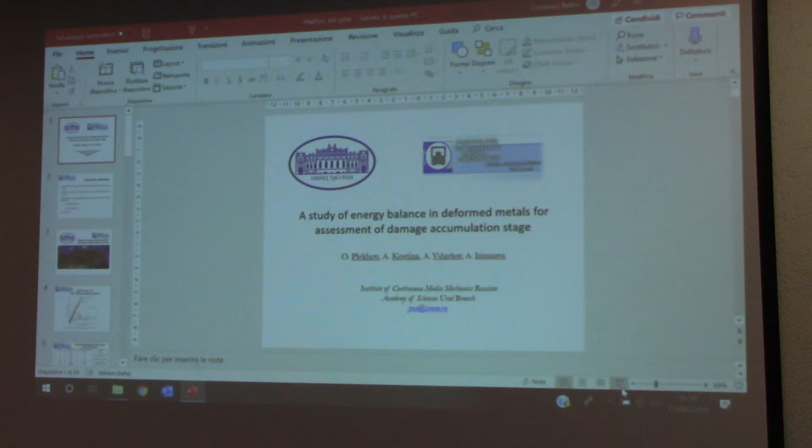I'd very much like to speak about infrared thermography and about stored and dissipated energy, but in this presentation I will speak about a theoretical approach. We try to simulate the problem of stored energy in the metal. And I will use the presentation of Mrs. Svideniko as an introduction for my presentation, and I'll just summarize what has been said in the first presentation.

Now we and a lot of teams can measure the dissipated energy during the tensile test. If we can measure the dissipated part, we can measure mechanical work, and finally we can measure the stored energy. In the beginning of my presentation, I will say several words about why it's interesting to measure the stored energy. After, I will present our attempt to develop an analogical model, and will show some examples of numerical simulation.

So this work is going on in the Perm Federal Research Center, and I have to say several words about the research center. Now in Perm we have collected several institutes, and we have a pretty big center, about 1,000 people. It's a multidisciplinary center, with biological, geomechanical, chemical, and mechanical applications. And we launched very interesting transdisciplinary research, and some of it was presented at this conference.

So the next slide presents the outline of the presentation. In the beginning, I will say a lot about motivation, after that the mathematical model, and examples of simulation. So before starting, just an idea about Russia and the location of our institute. We are not far from Europe, just on the geographical border of Europe. It's located near our city.

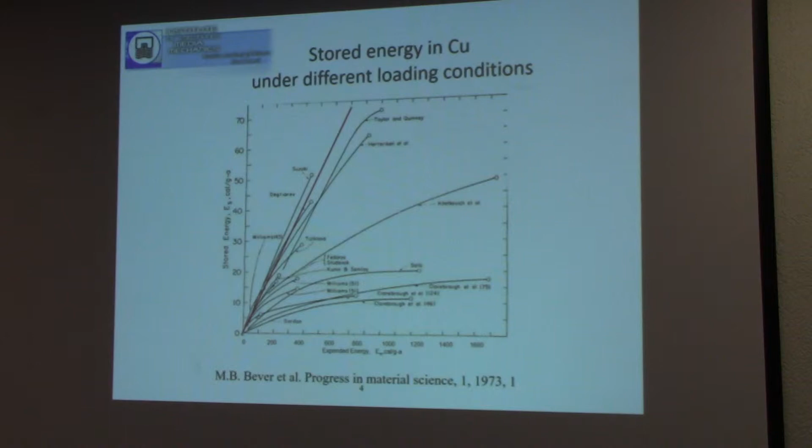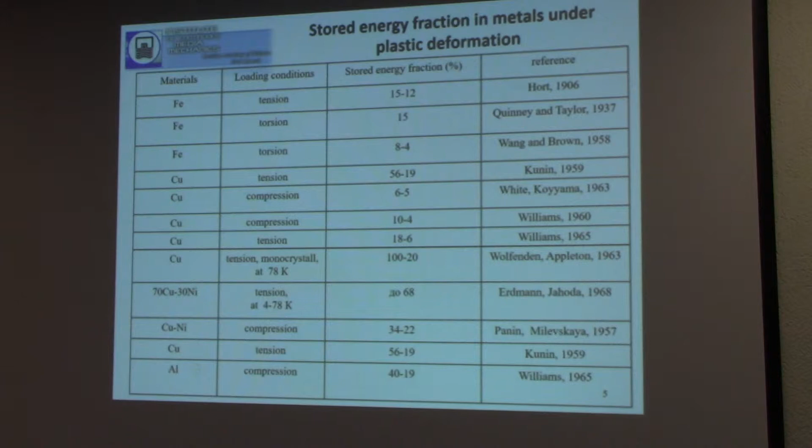And if we have a look at another work mentioned in the Bever report, we can see extremely big values of stored energy. For example, at very low temperature, plastic deformation is a completely undissipated process. It's published by Bever. I have never checked it experimentally, but it's possible. And if we go to new experimental investigations, I have to mention the team of Professor Oliferuk.

They made very interesting experiments with control samples, and measured the rate of stored energy under plastic deformation of steel. And we can see that the rate of stored energy can increase up to 43% in the beginning of the plastic deformation process. Here in our work, it's dynamic loading, and we can see also the dissipated part. It's quite small for some materials.

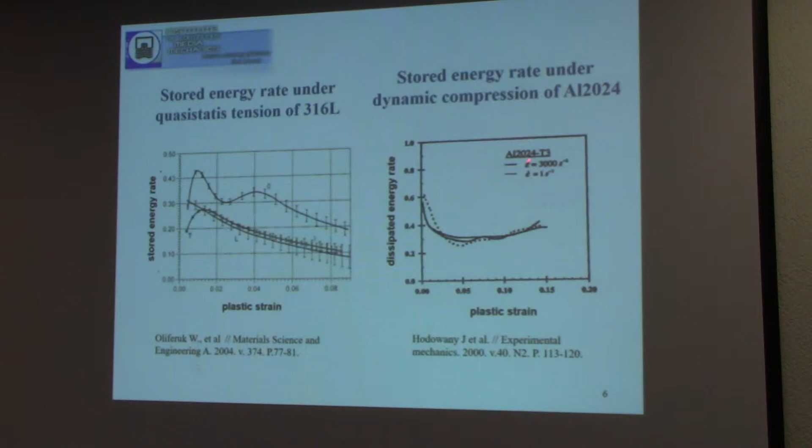We can go further, and I would like to show this picture. It's about 40 years old. It was published in Russian books, which means the results were obtained before, about 50 years ago. And this work was devoted to the thermodynamics of strength and fracture.

Here, it's not very good quality, but the general idea: it's different steels under cyclic loading, and the people measured the stored energy under cyclic loading and have shown that fracture corresponds to the same value of stored energy. The stored energy, not dissipated but stored, is a well-defined fracture criterion.

Generally, if we assume the Taylor-Quinney coefficient is constant, we can say that the stored part is proportional to the dissipated part and try to measure the dissipated part as a fracture criterion. But sometimes the proportionality can change, and from this point of view, the stored part is the most important part.

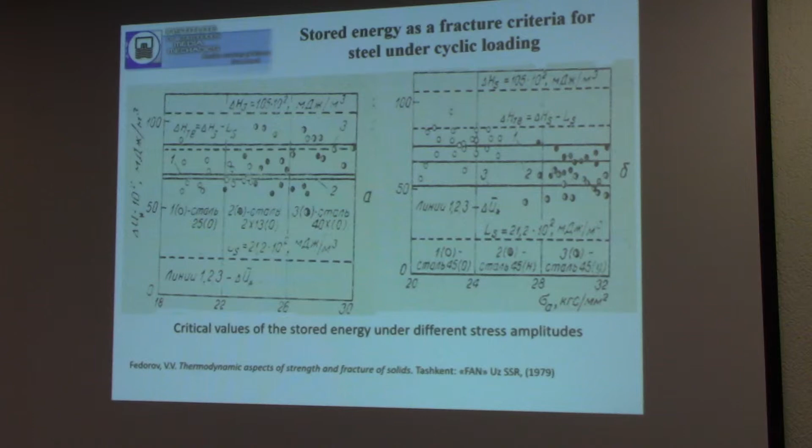We have a lot of experimental attempts to measure, but here I want to start from thermodynamics. And when we try to simulate, to study the energy balance in metals, we have to start from the first thermodynamic law, second thermodynamics law, and try to find some thermodynamic potential for our system. It's a key question, and there are many books devoted to the thermodynamics of solids with defects.

For example, if you are following the way which was published by Rosakis, and we propose that there is no effect of defect accumulation on the heat capacity, and no effect of defect accumulation on elastic properties, it's easy to show that we can write the energy as three parts. One is standard, the second one is an entropy of plastic deformation. It's a very interesting parameter. And the last one is the thermodynamic potential corresponding to the structural changing of our system.

And the next question, how we can describe the change in the structure in our system. Here, during my presentation, there were several bifurcation points. For example, this is one bifurcation point. If you propose that there is no effect of defect accumulation on heat capacity, we can write this equation. A few months ago a book was published by Professor Raniecki from Poland, and he has shown that heat capacity is a function of plastic deformation, we can add additional items to this equation. And we spend a lot of time on measurement of the evolution of capacity as a function of plastic deformation.

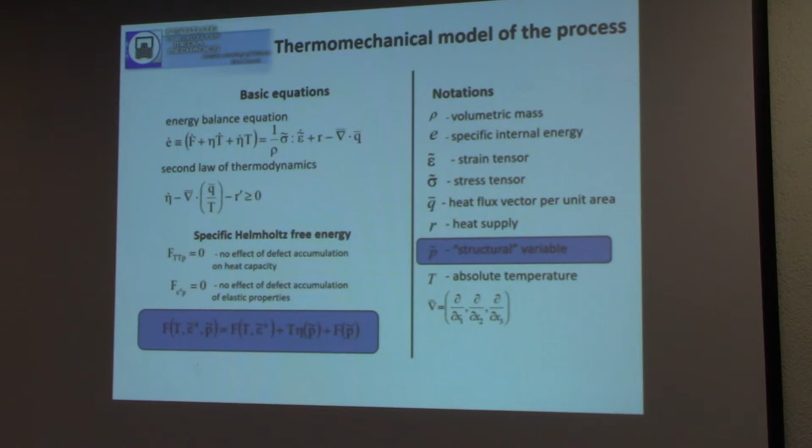So in this presentation, we forget about heat capacity, and we will forget about entropy of plastic deformation. It's also a very crucial point, but the theoretical description is quite simplified, and there are some theoretical books, some references, but in the middle of last century it was shown that entropy of plastic deformation is small and we cannot take it into consideration. But again, it's a bifurcation point and we have to discuss.

If we continue, we can write a well-known thermal conductivity equation with two sources, thermoelastic and thermoplastic source, and we have to determine the structural sensitive variables. It's quite easy to write a well-known equation of stored energy rate. And here you can see the coupling between the temperature and structure. Generally, we can, again a bifurcation point, avoid the coupling between temperature and structure, and practically we directly connect the stored energy and thermodynamic potential.

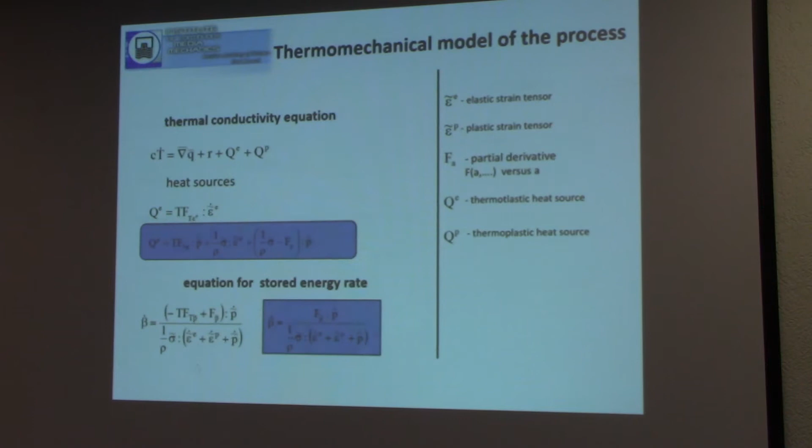It's not true, and there is a long discussion about whether it is possible to use stored energy as thermodynamic potential or not, but if we go through several bifurcation points, we can use this equation, and if we measure stored energy, we will have some idea how we have to write the thermodynamic potential. Finally, we can propose such a thermodynamic model of the processes. It's the dissipation inequality. It was described in another presentation by people from my institute.

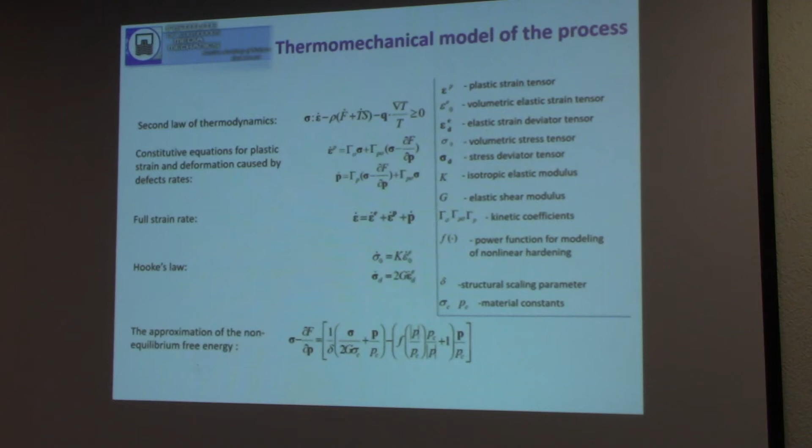If we use the local equilibrium condition, we can write the simple equation for the plastic deformation and structural sensitive parameter. And according to our tradition, we use the structural sensitive parameter as additional structural sensitive variables. And I'm going to show why we use such a kinematic relation for description. After that we can write Hooke's law, and we are looking for a good approximation of the thermodynamic potential. Why do we use structural sensitive variables as a deformation?

In the beginning of the century, the mesoscopic theory of defects was proposed. The idea was quite old. It's Kachanov's idea about an ensemble of cracks. We are trying to calculate the energy of each crack, try to do some averaging based on statistics, and we can obtain additional deformation caused by such types of defects. If we are able to solve the statistical problems, we can determine, at least qualitatively, the form of the thermodynamic potential.

So we have practically two different ideas. We have experiments with stored energy, and we have the statistical theory of defects, and we try to simulate the stored energy evolution under plastic deformation. In the simplest case, the one-dimensional case, we can use special equations for kinetic coefficients, and finally you can see the simulation of results of Professor Oliferuk, the experimental and theoretical results of stored energy evolution under tension of steel.

It's a phenomenological model, and we have very good correspondence between experiments. But we are trying to move to the next step and propose a three-dimensional model, which can be adapted in a standard package, for example, in Abaqus or in Ansys, which is able to simulate plastic deformation and the stored part. For this purpose, we try to combine our idea about structural sensitive variables and general phenomenological plasticity.

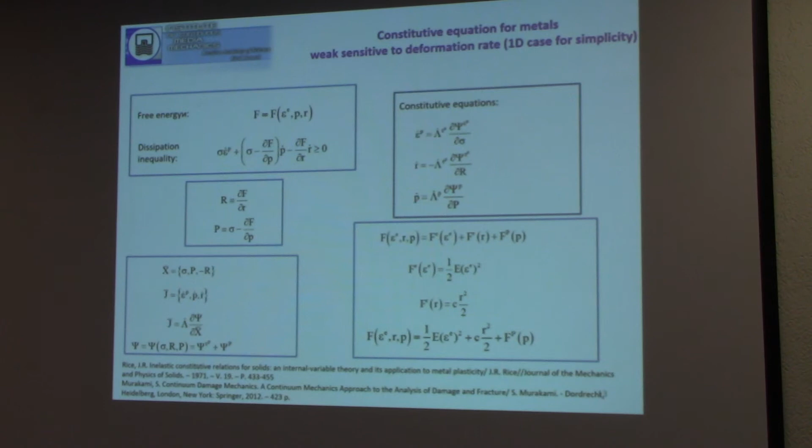But practically it's classical plasticity theory. We use the incremental law of associated rules for our variables. We introduce plastic deformation, we introduce isotropic parameters and structural sensitive variables, and write the dissipative potential for our system. Following the standard procedure, we can propose strain sensitive and strain unsensitive variables for different kinds of materials.

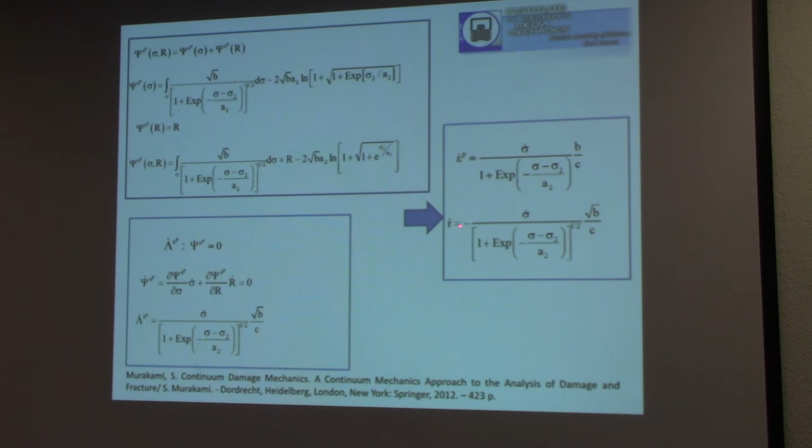We find the approximation of dissipation potential for plastic deformation, add some ideas about thermodynamics of defects, and here you can see, I'm not going into detail. In the mathematics, it's general. It's a well-known formal approach, and we can obtain the equation for plastic deformation and for isotropic hardening, in a stress unsensitive way, and in the stress sensitive way for our structural variables.

Finally, we used two different versions of our model: weak sensitive for deformation rate and sensitive for deformation rate. And in this model, we have two parts. Dissipative parts, it's practically classical plasticity, and an additional part which describes the energy stored in our ensemble. We can forget about the Kachanov ensemble. It's just a phenomenological parameter which can be used for simulation.

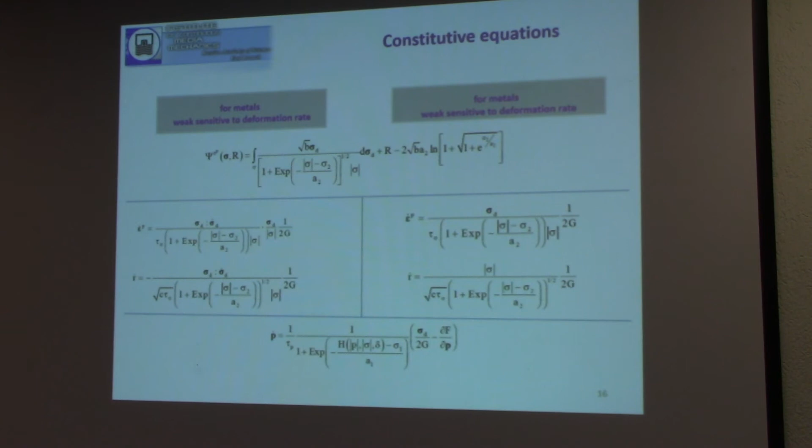And here you can see the sets of equations which can be used for simulation, and some examples of our simulation for quasi-static tension. For example, here it's for different materials: Armco iron, steel. It's a Russian name of a steel, but I think it's 304L steel and 316 steel, something like this. And titanium OT4. It's also a Russian mark. As I know, there is no direct connection between this Russian titanium and European.

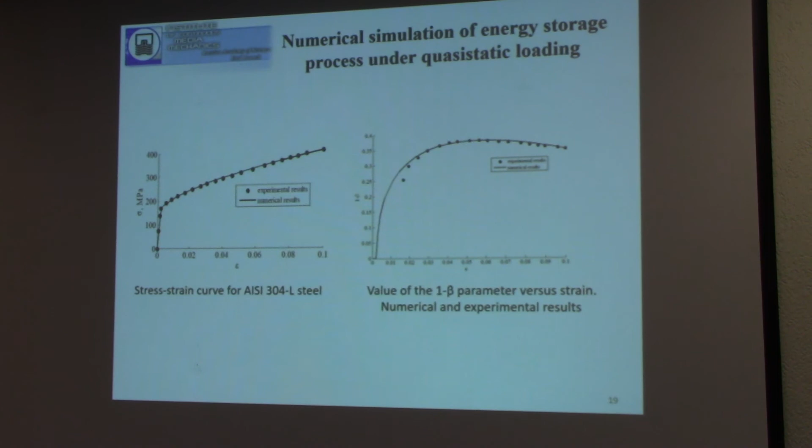We have very good, of course, if we have a phenomenological model, we have very good results. It's the same, theoretical and experimental, but this model gives us the opportunity to calculate the dissipated and stored part. And here you can see the results. For example, it's mechanical parts, it's dissipative, it's stored energy rate for steel. It's very interesting. We can find some very thin parameter. For example, it's experiments, it's our simulation.

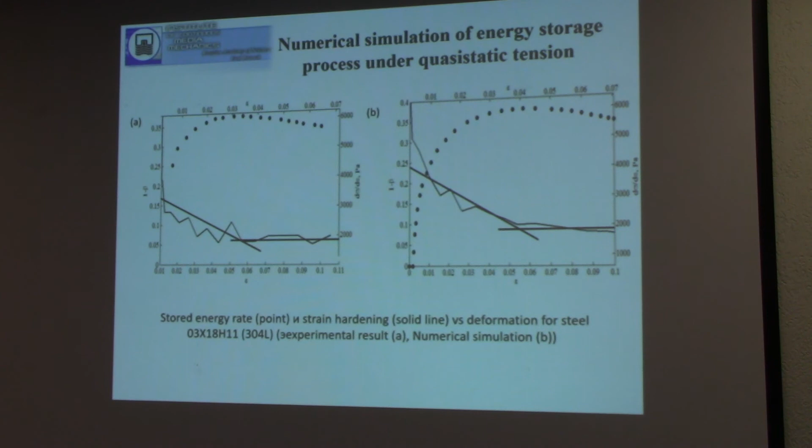Here you can see the stored energy rate. Here you can see the hardening coefficient. And there is a key point on the hardening coefficient which corresponds to the maximum of stored energy in experiments. And the same we can obtain in numerical simulation. There is a key point in the hardening coefficient, and it's a maximum of stored energy rate. And next slide, I will speak just about this. It's our result. This was presented a few minutes ago.

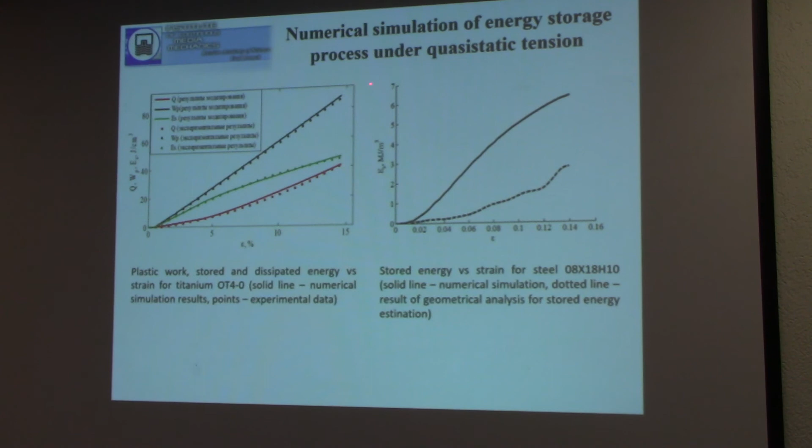We can measure the stored, dissipated, and plastic work, and we compare the experimental, and finally, we can use the same model for simulation of crack propagation based on the energy-based approach. For example, if we consider the energy balance at the crack tip, following, for example, Chudnovsky, we can write a very beautiful, from my point of view, equation which connects fatigue crack rate and practically the stored energy rate.

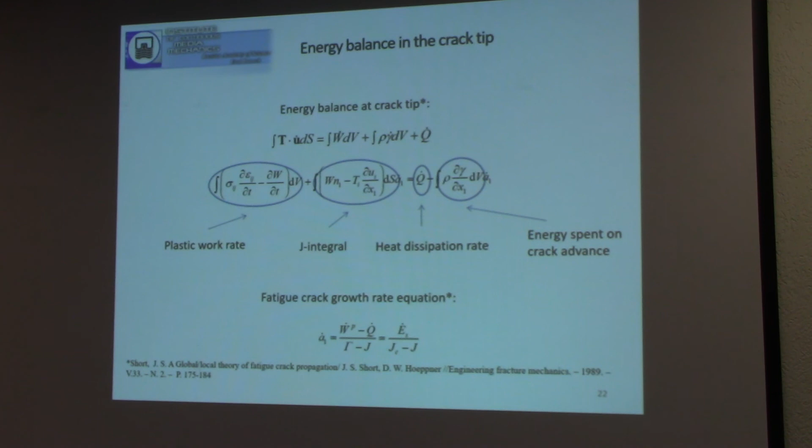And here you can see the damage energy and J integral in a very unusual position under the line. And we can use this equation and we can try to simulate the stored energy for crack propagation. We did some experiments. It's just an academic problem. We tried to solve the crack propagation, I guess, in titanium, no? In titanium, and we have a very good comparison between crack propagation and simulation based on our equation.

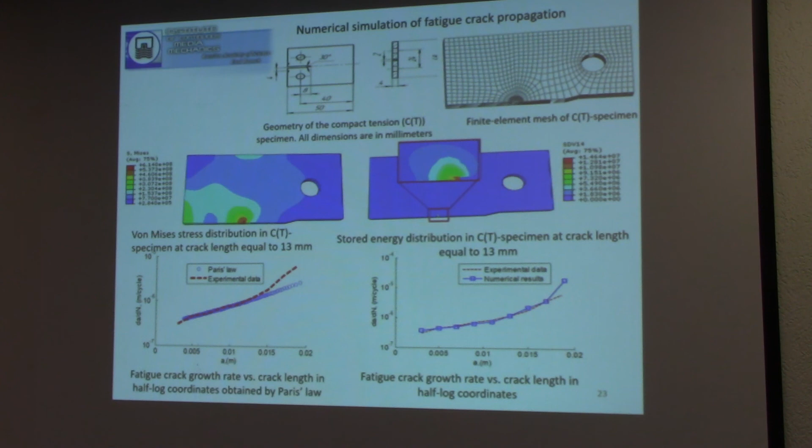But it's not a fully static simulation. We have a crack, make several cycles, calculate the energy for the last cycles, and estimate the energy rate. After, we take another crack and calculate it.

So, summing up, all has been said. I can stress again that stored energy is a very interesting topic and very important. And I have presented a phenomenological model which allows us to simulate some interesting, from our point of view, problems.